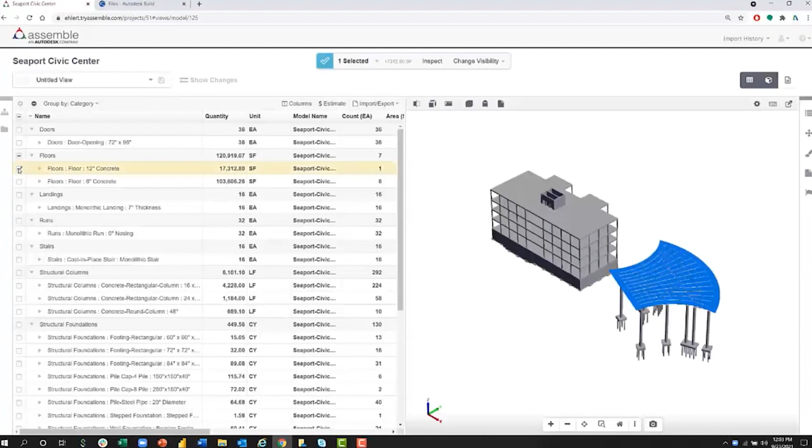So we can click into a model to view the Assemble interface. Just as before, we have the ability to view all the quantities in the inventory panel on the left side, with a dynamic connection between the model and those quantities. We can click on different objects, open properties, and see the model properties being pulled from the Revit model—all that rich metadata coming from the file. It could be Revit or any other file type that Assemble supports.

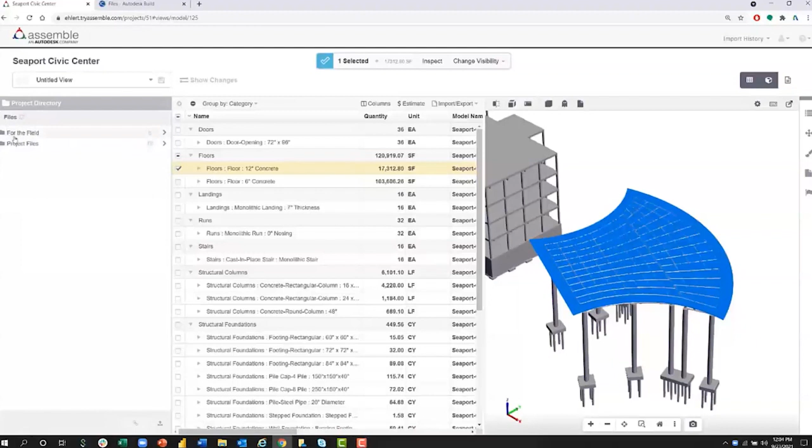We can condition the model using Assemble properties. We can even continue on with our existing integration here, looking at all the different properties in this space, pulling all of that information into here.

We also can do things like issues. We can go in, look at our 2D drawings in here, and look at issues. The issues integration will link to our Docs environment where I can create issues directly on the model. Maybe this is a design issue that I need to send back to my architect. So we could take a 3D snapshot in here, and that's going to allow me to populate the issue, save it, and then I can even manage that within Assemble or within Autodesk Docs.

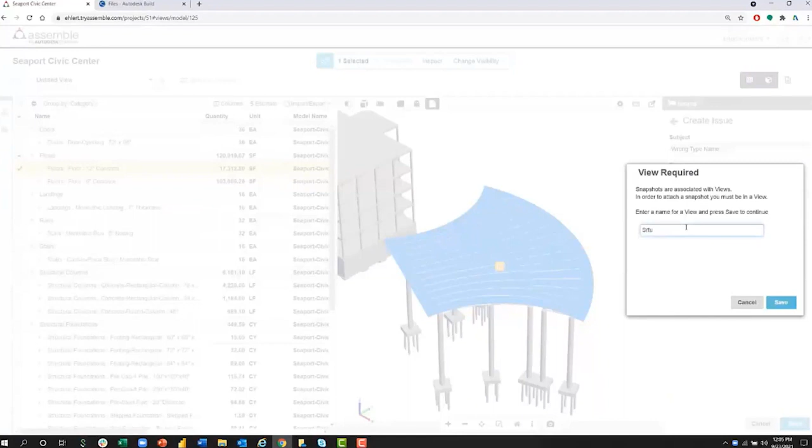So we don't have to have folks going into Assemble to be able to see this information. That's why this Assemble to Autodesk Docs integration is so important. We can link this to the view so that we can reference this down the road—that's kind of saving it as a view, right? That issue is now being saved as a view.

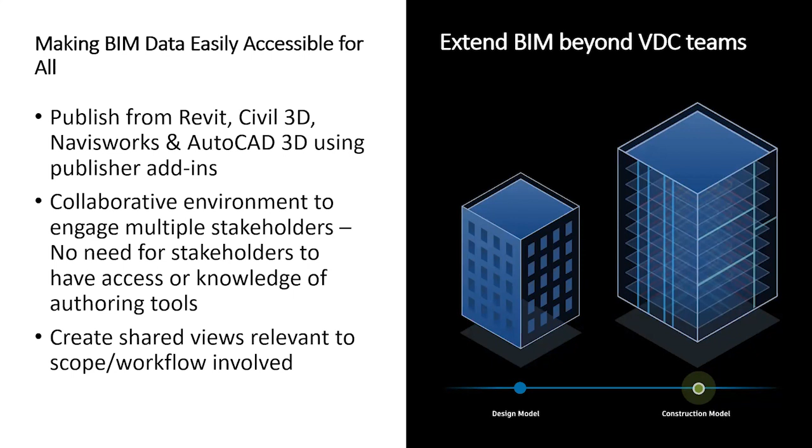Okay, so let's dig in a little bit deeper. We just talked about our latest cloud publishing workflow that works for Revit models currently, but Assemble also has the power to consume a variety of different model types, whether it's Revit, Civil 3D, the very complex Navisworks, or even AutoCAD file types. You can use our publisher add-ins to push these models directly into Assemble's web environment so that everybody is able to access that information from there. This enables projects to not be reliant solely on Revit-based processes, because there are still a ton of projects leveraging a very wide range of different types of models today.

Okay. And we also talked about before that models don't always have all that construction-rich data that a team often needs. So with Assemble's model conditioning workflows, we can quickly add construction-rich information to the model in that cloud-based environment to make it really easy to follow, or really easy to understand, to take in, to interpret.

And that also allows our project teams to break down different areas of the project in the way that they need to. So for instance, if I'm only focused on windows, or I only need to see doors, or I'm only looking for a certain type of framing, I can condition the model to hide everything else that I don't care about. I can easily quantify. I can easily look at those properties. I can colorize, right, to very quickly understand what I'm looking at. So that model conditioning can be incredibly helpful for just better understanding the model without all of the overwhelm of looking at the entire thing.

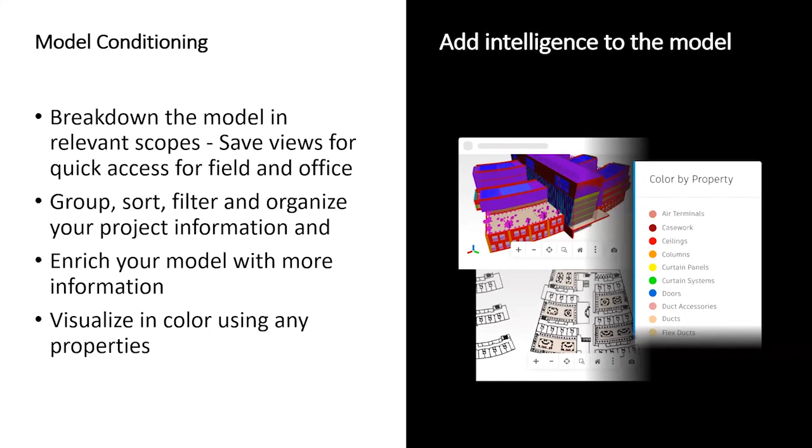Okay. We also discussed those constant changes that are happening throughout the design model and throughout the project itself, right? And so we really need to have a way to quickly understand those changes and how those changes are impacting the project schedule as well as the project budget. So with Assemble's change management workflow, you can immediately see the design changes with one click, and you can really understand if the quantities are actually driving up, right? Maybe certain things are increasing our cost, and maybe we have other situations where items on the project have been changed in the actual model that the field teams are currently working on.

So it's really important that we're able to share that information so that we're not having to do redundant work. If that's the case, right, if things that have been designed have changed and we have our field folks working off of that obsolete information, then we can immediately get this information out to the field to hopefully prevent any of that additional rework and also waste of resources that might be happening.

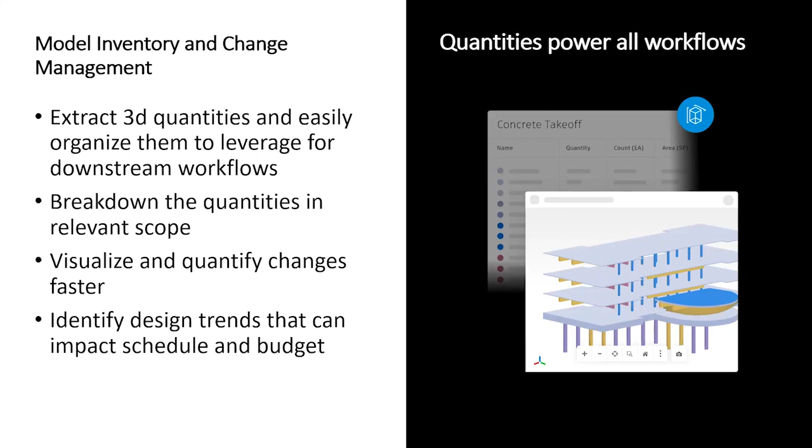Scheduling, keeping projects on track. So Assemble also has the ability to directly connect to your Primavera P6 schedule, if that's what you're leveraging, to map schedule start and end dates for quick visibility and to look aheads, to understand critical path, and really have a general visual, which I think is really key here, a visual understanding of how the project will be progressing throughout the project lifecycle on its current track, right?

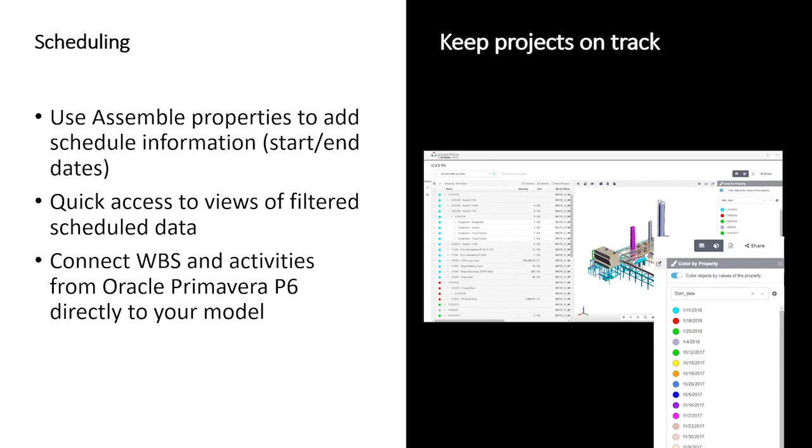So we can understand if our schedule is doing this, what does that mean for the rest of our project? And having that insight is really, really helpful. We don't just want to be crossing our fingers on a project and hoping it's going to turn out the way that we're anticipating. We want to have that confidence. And so scheduling and being able to see that inside of Assemble is really, really helpful here.

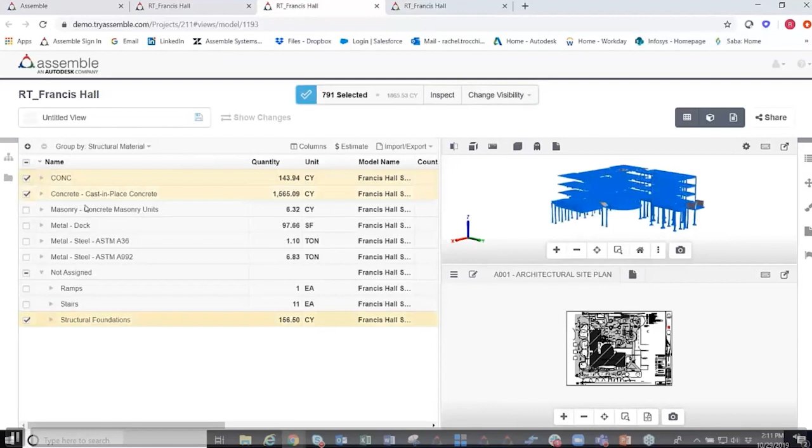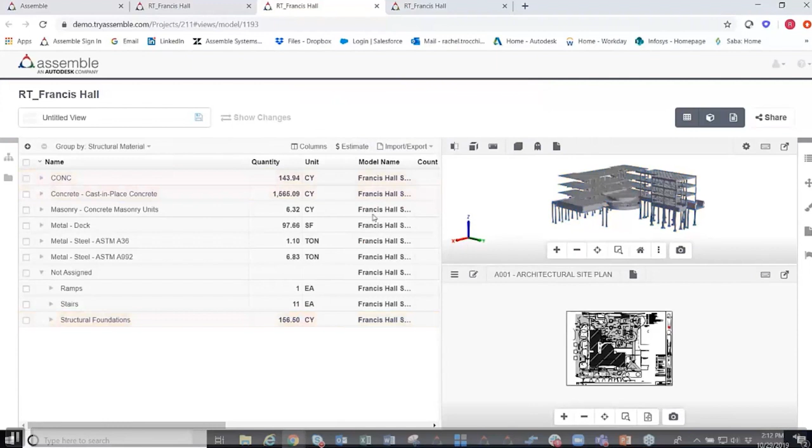So we'll grab those. And then what we can do is we can start to create a bid package of concrete information. We can start to leverage some of these Assemble properties that we have. Now, Assemble properties are properties we're building out in Assemble. We can filter directly into them, or we can reorganize them. We can pull out whatever data we might need to see. We can filter down into that concrete. We can grab bid packages.

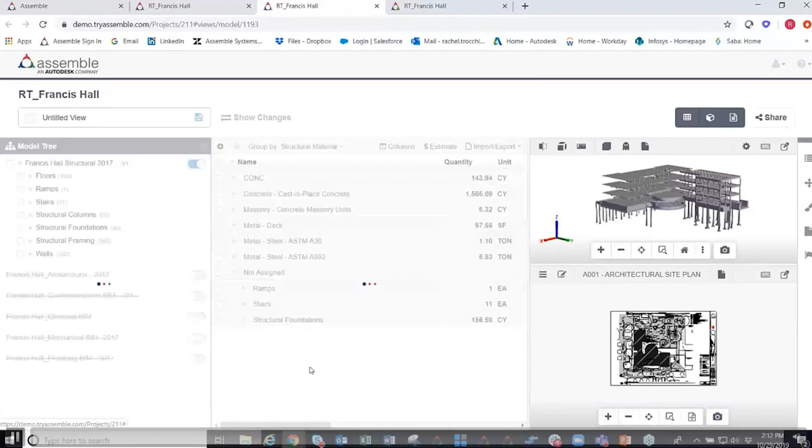We can put in the value of the concrete that we're conditioning out, and we can actually go ahead and update this kind of stuff. Once we update that, we can see that we can aggregate everything into a bid package, and we can dig in a little bit deeper. So we have all of this design-rich information that we can leverage in this space here. So if I look into floors, right, I can look for a certain type of flooring in here. I can go over to the Assemble properties.

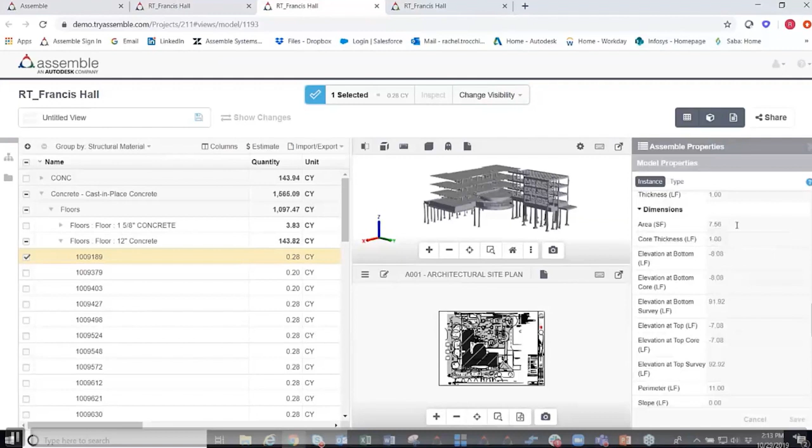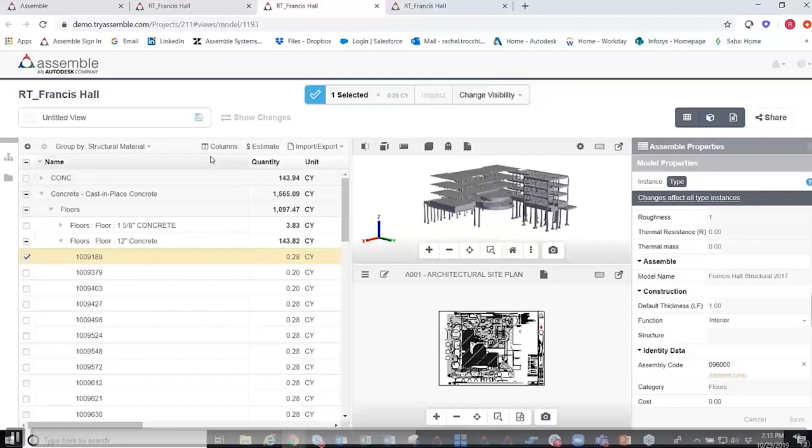Now, again, Assemble properties are what we're putting in Assemble. Model properties are the properties that are being pulled in from whatever design platform we're utilizing, but I can see all the model properties in here. So if I think about it, a lot of my folks don't have access to the design software itself, and they can still get those model properties that are so important in this space without having to have Navisworks, without having to have all of those other costly and often siloed design solutions.

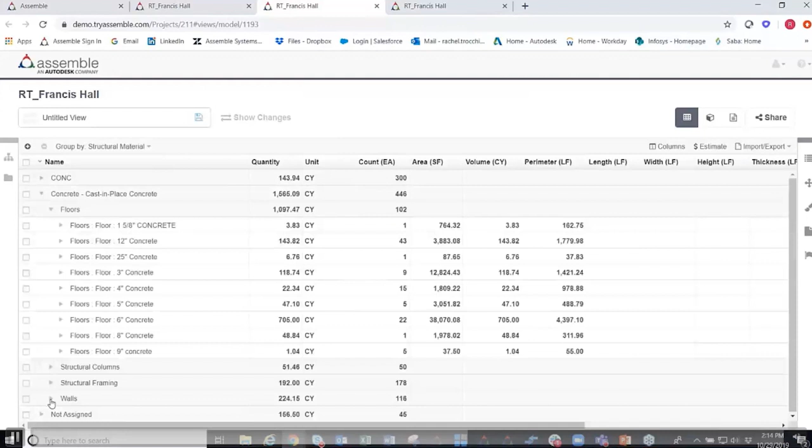So we can also decide what we want to see in here in terms of properties. If I want to turn certain things off, I can. If I want to change the order of the properties, that also goes for my inventory panel in here, right? I can look on floors and only see the information that I need to see. So for example, if the thickness wasn't relevant to me, which it would be, but if it wasn't, I could just eliminate that column.

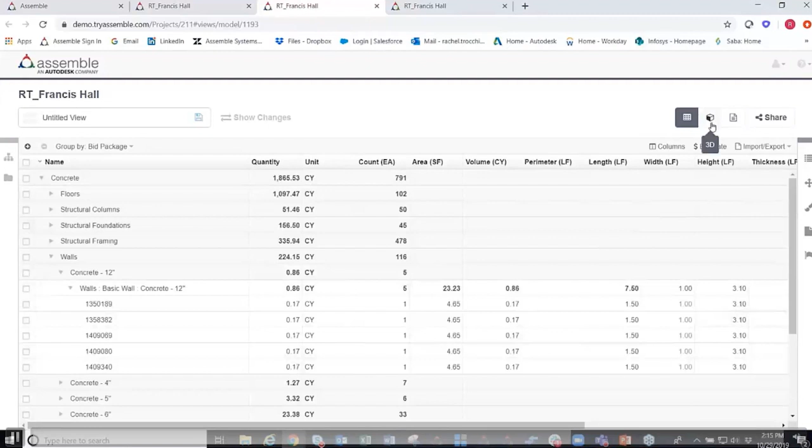We can order by bid package. So once I build out a bid package, I can look specifically for that concrete bid package in here. You can go in, see the different components of that bid package. I can see the quantity. Now, again, if anything changes from that model and I'm hosting that model in Autodesk Docs, which is then being pushed into Assemble, these quantities are going to automatically change for me. And I have confidence that we're utilizing the latest and greatest model, right? Because it's coming from the Autodesk Construction Cloud, which is really my repository of all of my most recent information.

You can also colorize by property. This just helps me understand what I'm looking at a lot better. So this means that if I want all my floors to be green, for example, I can colorize in that way. That allows me to very quickly look at that model and understand what I'm looking at. You can colorize anything. Any object that lives in this Assemble model can be colorized.

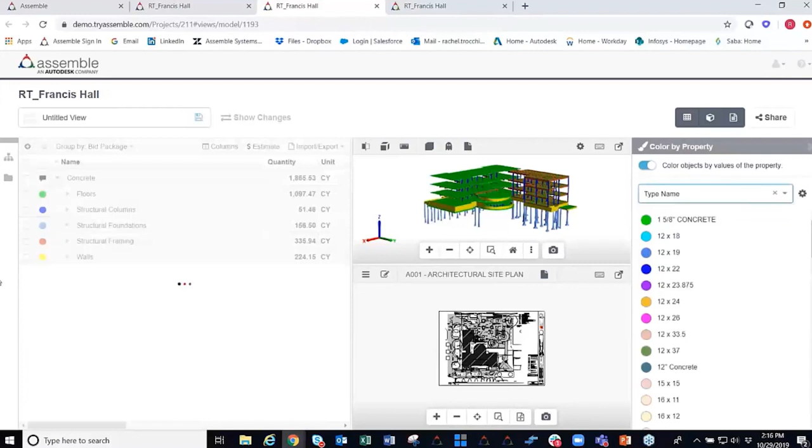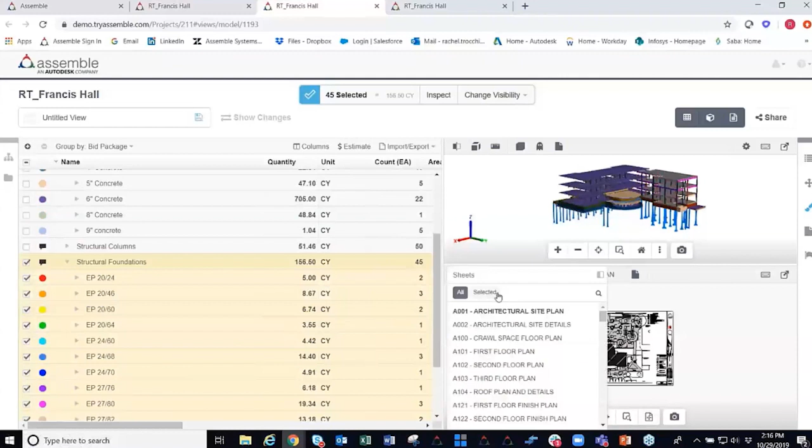You can get really specific, right? Look at what we're doing in here. This is for our flooring. We've broken it down. Well, this is walls, but let's say we're looking at flooring. We're breaking it down to the different types of flooring that we have in there. We can colorize those different areas, so I know exactly what I'm looking at. If I'm looking for a certain type of beam, or maybe a certain type of foundation, if I know that that's pink and all that I'm looking at is my flooring right now, I'm very easily drawn to that.

Also important to note that the 2D model is fully connected to the 3D model, which means if I click on a component in my 2D model down there, that's also going to highlight it in my 3D model. This can be really helpful because there can be a really big learning curve from getting people comfortable working in a 2D environment to a 3D environment. But because of that interconnectivity, the inventory panel is connected to the 2D sheet, is connected to the 3D model. No matter what I click on, whether it's a component in the inventory panel or the 3D model or the 2D sheet, it's all going to be highlighted in all three of those spaces.

And I have seen that be very, very helpful for folks in getting more comfortable working with 2D models or 3D models. If they know where they need to click in a 2D model and they can see what that looks like in the 3D model, they're more open, I think, to working with 3D models in the future. But that connectivity and the ability to colorize, I think, is very helpful in creating bid packages, understanding what you're looking at and understanding quantities.

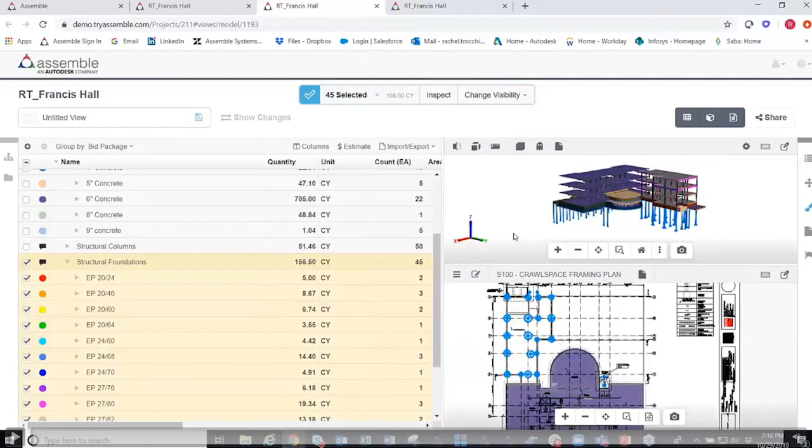Okay. So let's now talk about how we can empower the field teams, which I was talking about a little bit. I think our field folks can be a little uncomfortable working with 3D, but let's talk about how we can empower the field teams with BIM. So a common pain point across our customers that I've heard a lot is giving access to the model in the field. How do we do that, right? Those folks are not out there with Revit or Navisworks. They can't see the whole model. So let's show how Assemble can help during the construction phase when folks are actually out in the field with their iPads.

Okay, so according to a recent survey, about 62% of construction professionals transfer field data manually or via a spreadsheet. And we know that that's dangerous, right? If we're doing anything manually, we have completely thrown out the window the assurance that we're using the right, most up-to-date information.

And as I've mentioned, breaking a spreadsheet, super easy. Also don't have the confidence that we're working off the right information. Also, about 30% of data created during design and construction is lost by the time the projects are closed out. Don't know where it goes. I used to work in construction, so I know I would throw stuff in the back of a truck and I don't know where it ended up.

So if we're not doing things in a technical way, if we don't have any kind of a repository or that common data environment, information is gone. And at the time of handover, we don't have the stuff that we need, right? So with BIM in the field and Assemble, we can leverage our work in place tracking workflow to make this much easier for the field.

So work in place tracking means that I basically am visualizing what's already been checked off, right? Work in place tracking, I'm tracking what I'm currently working on. If we're just doing 2D sheets or we're just doing spreadsheets, we don't have a way to track that at all. But we're going to see work in place tracking in a visual way is incredibly helpful for our construction teams, and it makes the field work that much easier.

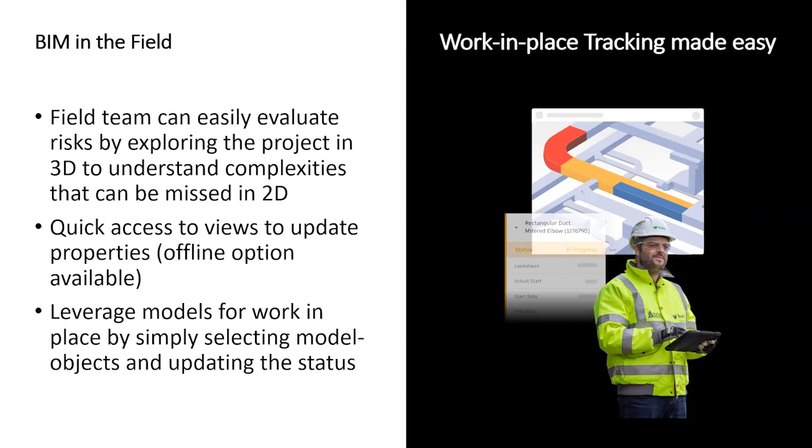That also helps me so that when I come back to work tomorrow, I have a clear remembrance of what I did the day before and a clear picture and track forward of what I need to get accomplished the next day.

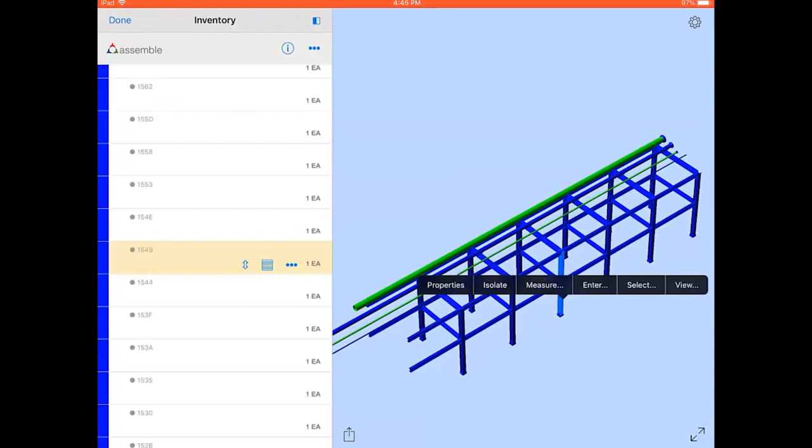Okay. So we are going to run through a quick example on an iPad. So this is what folks would be using in the field, right? So we're looking at zone 1 right now. We're doing a job walkthrough. So we have some piping, some structural members, and we're going to status those using the mobile app. So all you have to do is double click on an object, right? You can see its properties just like we could on the desktop.

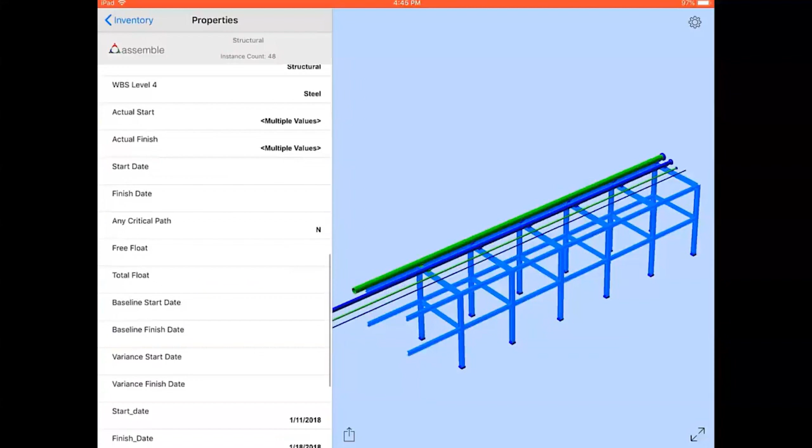We can isolate it. We can give it a status. We can, again, access all of the properties there. You also can select a line item inventory to select on a group of objects, right? So here we're looking at the Assemble properties. Again, those are the properties that live on top of the rich data that's coming in from Revit.

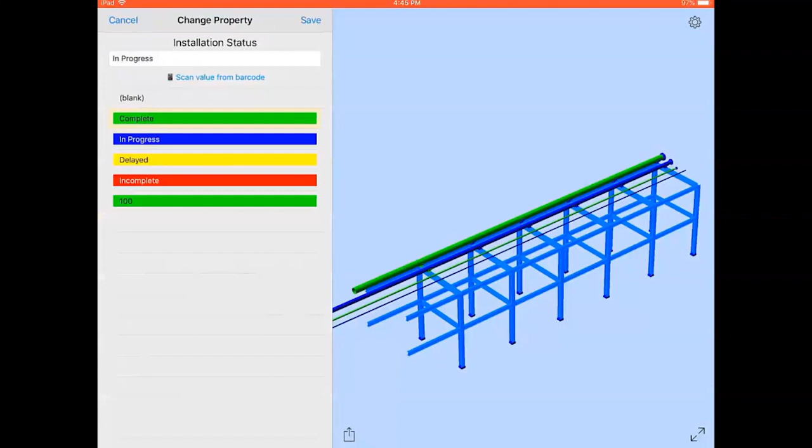So one of our Assemble properties can be actual finish time. So I can change the finish time in here, saying when we got it done. So now that's updated. That's going to go back to the office as well, right? Again, these are all the Assemble properties. So I can come in, I can change the installation status. What I'm doing right now is for this individual column right here, but we could be selecting everything and that could be updating all of this at one time.

So that's essentially it, right? We can go through, we can click item by item and update the installation status. We can change the completion date in there too. If that's a property that we have in there, we can do that individually, or we can grab a whole bunch of stuff. We could say, I worked on all of this today. This has all been installed. The completion date for all of this was at this time.

Now, the reason that you might want to go in there and do items one by one is if you're barcoding anything, right? We can barcode in here too. So I could put a serial number in here. That's going to be really helpful because then I can take my iPad, I can just go scan that item and I can get all of these Assemble properties as well as the model properties too for that specific item.

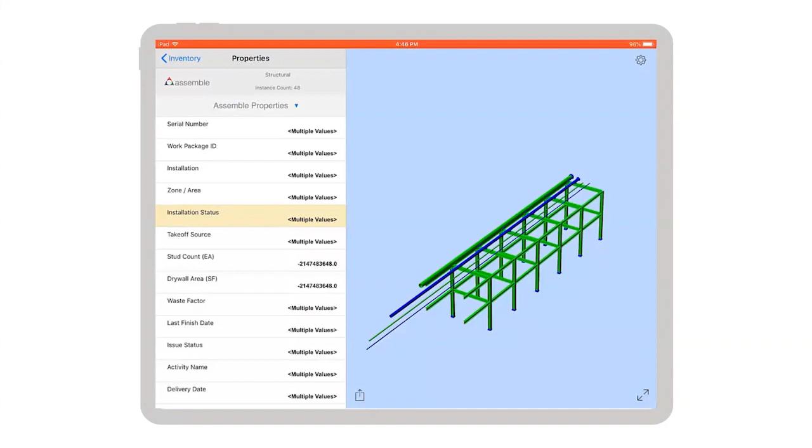So as I mentioned before, these Assemble properties are totally customized. You can have whatever information you want in here. Just click on the item. You have all those properties in there. You can, again, add those individually or in a bulk way. But that's a really easy way for our field team to do that. And that was all done offline, right? To capture all of that information and then get that instantly back to the office.

All right. So now let's talk about how we can harness and leverage that BIM data from the design model through construction and allow us to report using our Power BI integration. You do not have to use this Power BI integration to find so many positives and such a good ROI with Assemble and Autodesk Docs. But this, I think, is kind of the icing on the cake and a really cool thing that you can do with the information that you're building out.

So with our Power BI integration, we can create dashboards and reports, and we can use those for reviews with project teams. We can use those for reviews with key stakeholders. We can look at work in place tracking, right? We can look at percentage complete. Those are things that project stakeholders care about, right? What has been done and what is yet to go, not only on the entire project, but mechanical or plumbing, piping, what's been completed? What do we still have yet to go? That's really key information to show those folks.

This automatic integration makes it really easy for us to visualize project progress, schedule, status of the project by linking with, again, that Power BI dashboard. So these fully interactive and customizable reports and dashboards help you to drill down into the project data so that you can improve project control and outcome, not only on the project that you're currently working on, but projects in the future. Okay? So let's show a quick visual of what that integration looks like. I'm going to do that in just a second.

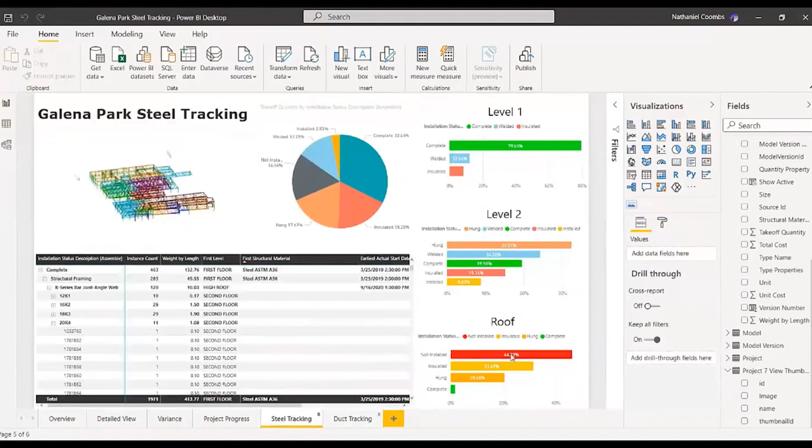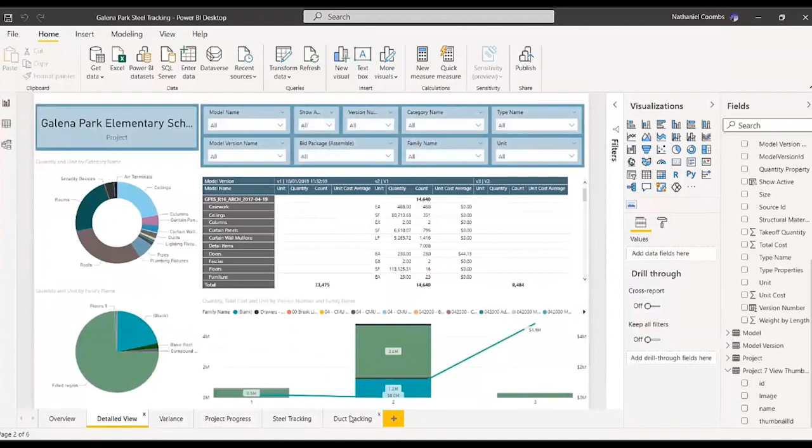What Power BI does, what this integration does, is it allows for automatic reporting by just clicking refresh and getting the latest information from the field, right? From that Assemble installation statuses that we were looking at in the field. So we're not having to do any kind of duplicate entry back in the office. I'm not having to take this information and put it into a spreadsheet. So with automatic reporting linked to Power BI, you can create these really, I think, good looking reports here, right? Looks a lot better than just an Excel spreadsheet that we can take in the project model, and then we can drill down into all the different quantities and statuses.

So these templates, you don't have to build out. I know that could feel really overwhelming. I wouldn't want to do that. They come with the Power BI integration download. So if you downloaded Power BI, integrated it with Assemble, all of these templates are already going to be included. So that information from your Assemble project will automatically come into Power BI here. So really there's a low barrier to entry to use these reports. There's not things that you have to learn. There's not a big learning curve there. So it's really, I think, very helpful to synchronize that data in a very, very easy way.

Okay, so that wraps up my conversation about Assemble and Autodesk Docs. I just want to recap the agenda really quickly. So we talked about current challenges that our BIM teams are facing. Hopefully a lot of those resonated with you. I know I could feel some pain from current roles I've faced and some resonance there. We talked about connected construction. Lauren helped us understand what the Autodesk Construction Cloud looks like and how we're connecting all 4 phases of our project together. We looked a little bit at model conditioning.

We looked at colorization, right? Colorizing different components of our models. We looked at BIM data management. We looked at what it would look like in the field to do work in place tracking, to set those installation statuses. And then we looked at Power BI and how we could get that reporting information out really easily.